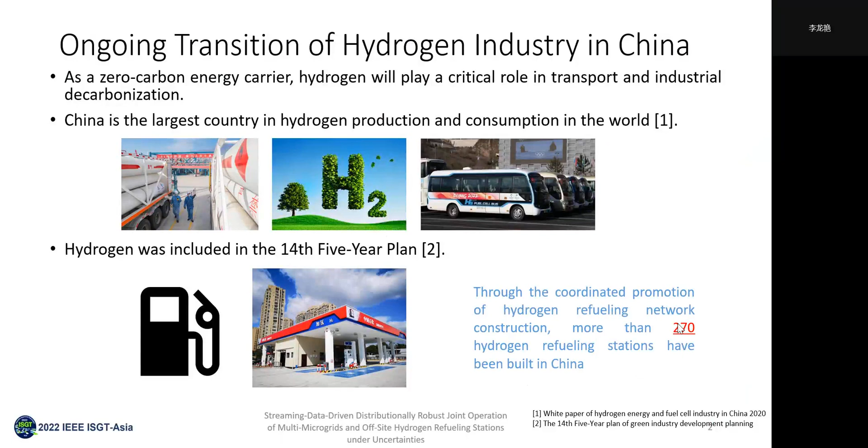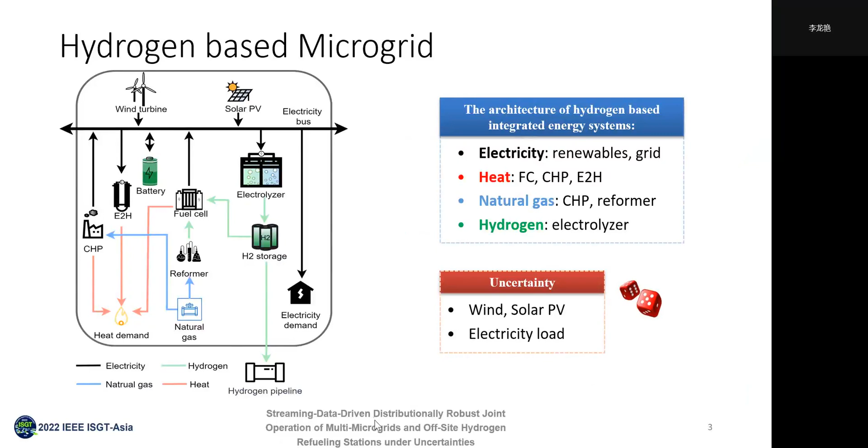We consider a multi-microgrid system coupled with off-site hydrogen refueling stations, which is illustrated here. Although on-site hydrogen refueling stations have achieved a certain level of applicability, the investment and operation costs of on-site hydrogen refueling stations are much higher than its off-site counterpart. In addition, on-site hydrogen refueling stations tend to have smaller capacity than off-site hydrogen refueling stations.

There are two levels of the energy management, which are Central Energy Management System, abbreviated to CEMS, and the Local Energy Management System, which is abbreviated to LEMS. It is worth noting that the hydrogen pipeline network and hydrogen refueling stations share a common LEMS. In this bilevel structure, CEMS is responsible for determining the optimal amount of power exchange among microgrids, as well as the hydrogen transaction between microgrids and the hydrogen filling stations. Subsequently, CEMS sends energy transaction messages to every LEMS.

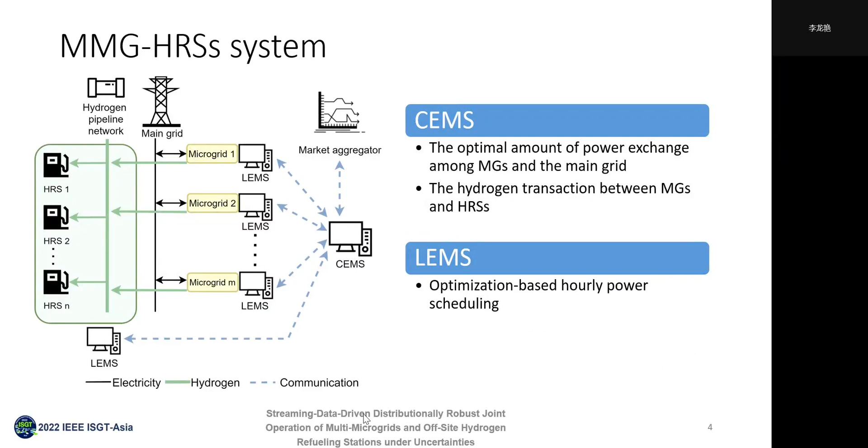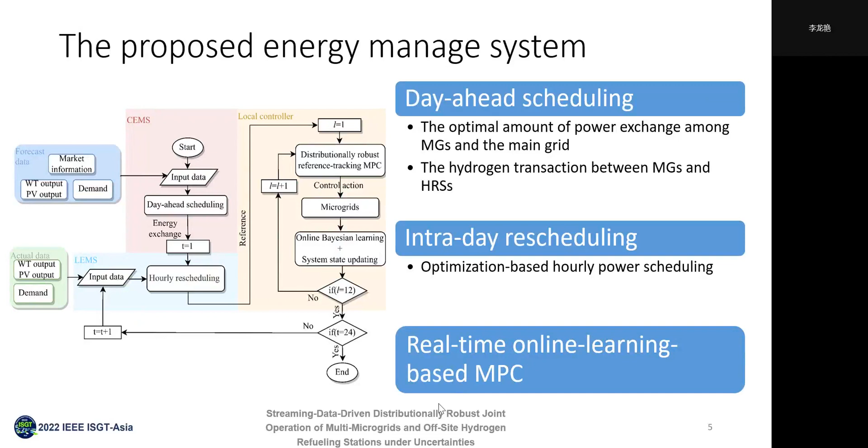After receiving the message, each LEMS performs an optimization-based hourly power scheduling and conveys the tracking reference to the local controllers. The flowchart of the proposed EMS for multi-microgrid is illustrated here. Concretely, the proposed strategy comprises three building blocks, which are day-ahead scheduling, intraday rescheduling executed in a rolling horizon manner, and a real-time reference tracking model predictive control empowered by online Bayesian learning.

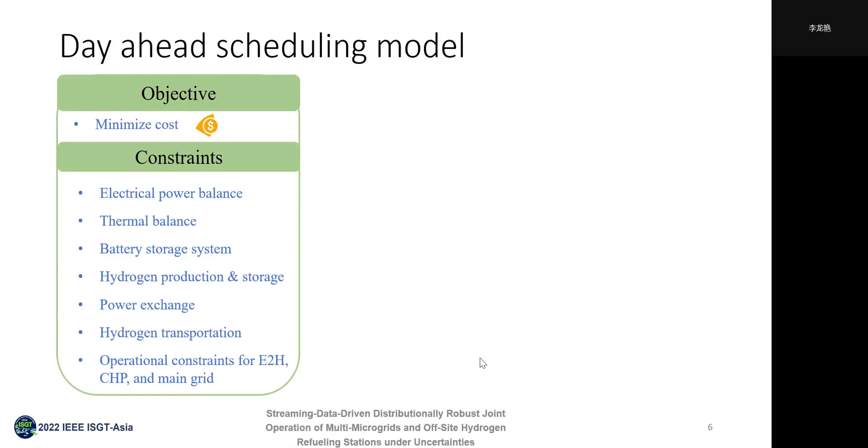Given that energy demand does not perfectly match the power supply, it is of great significance for the CEMS to coordinate energy transactions between entities. At this day-ahead scheduling, the objective is to minimize the operation cost, and there are 7 kinds of constraints. Notably, we consider the system dynamics of hydrogen storage and the line pack storage in the pipeline transportation.

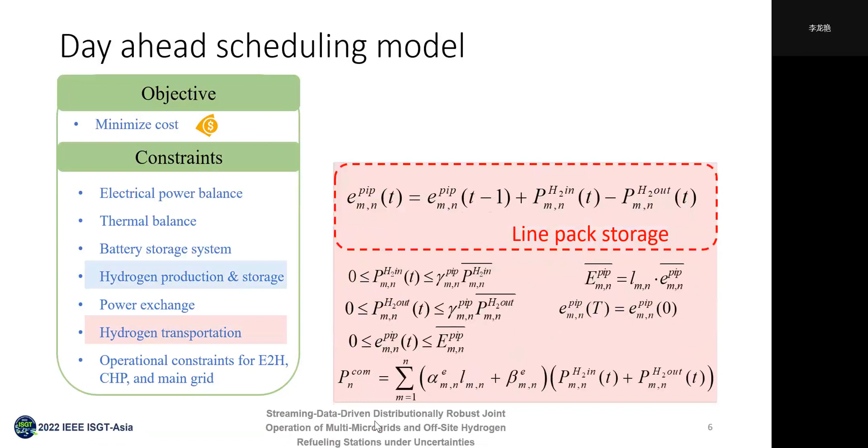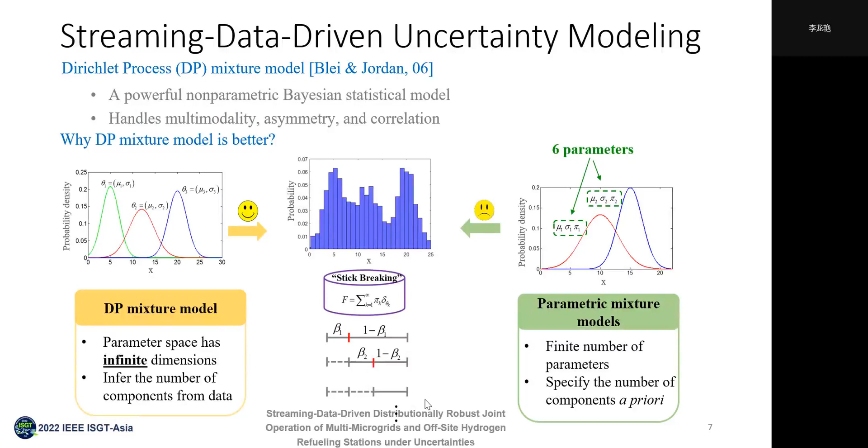The probability distribution of forecast errors in a multi-microgrid system is unknown and complex. We utilize a non-parametric Bayesian model called DPMM, which is a powerful non-parametric Bayesian statistical model. Why is DPMM better? Let's consider a data distribution like this. The traditional mixture model specifies the number of components as prior knowledge, so it cannot achieve a good result. By contrast, DPMM can infer the number of components from data, so it can handle multimodality, asymmetry, and correlation very well.

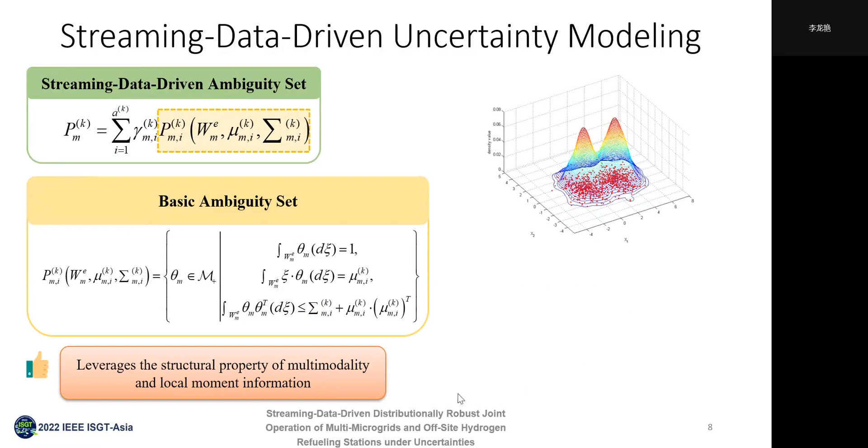To learn from the streaming data and capture the fine-grained statistical properties of uncertainties, we propose an online learning-based ambiguity set for every microgrid in multi-microgrid. It is constructed as a weighted Minkowski sum of several basic ambiguity sets as follows. Every basic ambiguity set is constituted using local first-order and second-order moment information. The novel ambiguity set leverages the structural property of multimodality and local moment information, and thus it has great merit of automatically accommodating its complexity to the structure and the complexity of data over the runtime of multi-microgrid operation.

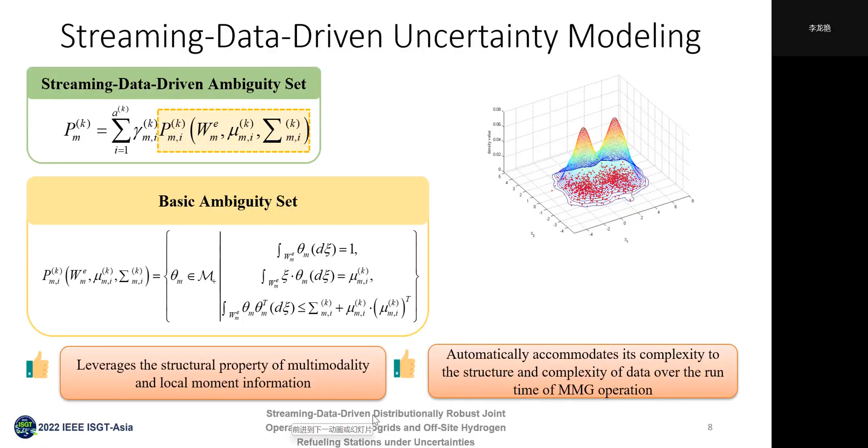After updating the ambiguity set with the aid of the latest forecast error data, the real-time optimal control problem can be solved. We utilize model predictive control because it is suitable for multivariate dynamic systems. The dynamics of the multi-microgrid can be reorganized into a state space model. Here are its system states and control input and the uncertainty.

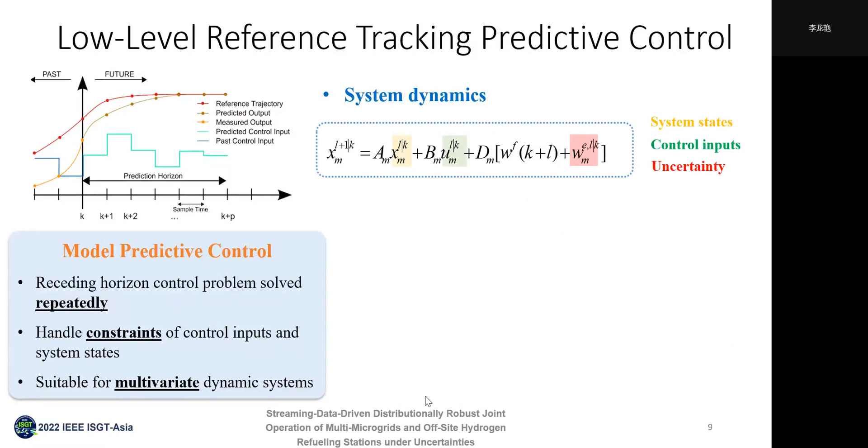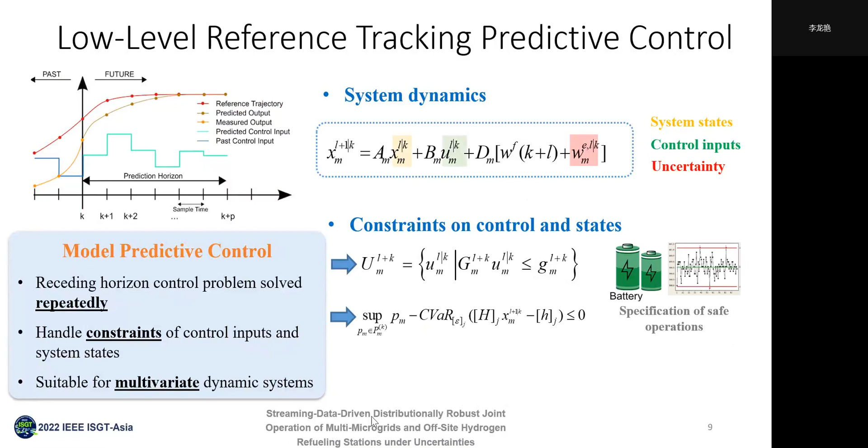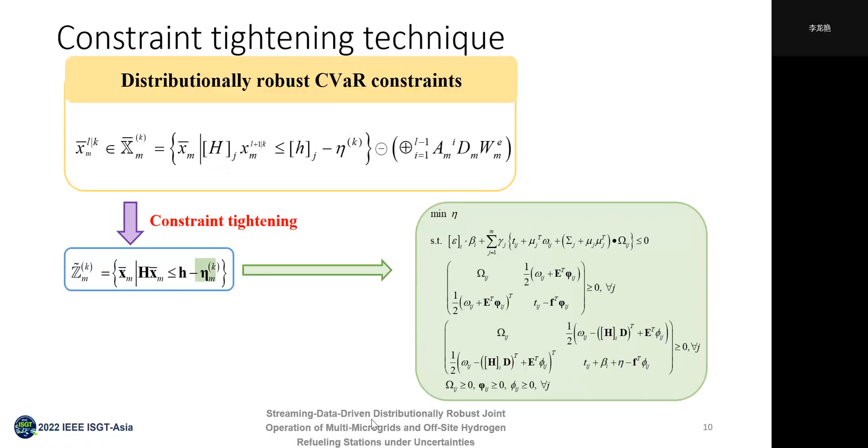To protect the battery under complex uncertainties, we implement distributionally robust conditional value at risk constraints on system states, which can be abbreviated as CVaR. For the convenience of solution, we adopted a constraint tightening strategy to reformulate the data-driven distributionally robust CVaR into a computationally tractable semi-definite program, which incorporates information learned from real-time disturbance data into online optimal control.